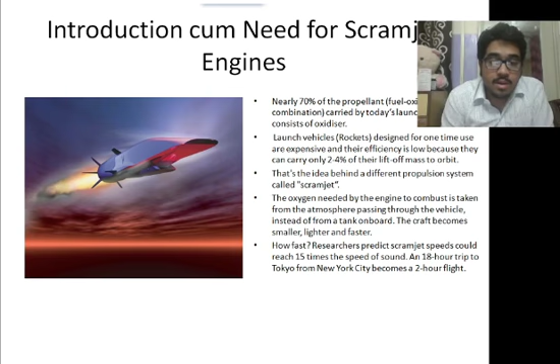And also, if we go through a commercial aircraft, it would take 18 hours to reach from Tokyo to New York City. But we can cover the same distance by scramjet engine in just 2 hours.

Now let's look at a brief history of the scramjet engine. In the 1950s and 1960s, a variety of experimental scramjet engines were built and ground tested in the US and the UK. However, the first successful scramjet engine flight test was done in 2002 by Australia. And until today, there are only 4 countries that have demonstrated scramjet engine technology.

Now you might wonder how difficult this technology is that only 4 countries could have mastered it. And the experimental work for a scramjet engine started around 1950, but the first successful flight tests were done in 2002. So you might wonder, why did it take more than 40 years to realize this technology into application? We will address this question later in the challenges.

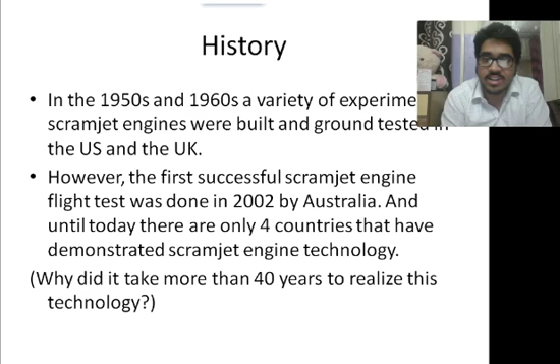Now let's try to understand the working and principle of the scramjet engine. But before trying to understand the principle of scramjet, we need to understand the principle of turbojets, because turbojets came much earlier than the scramjets, and it will help to understand the principle of scramjets. You can see in this picture down here, the picture shows Rolls-Royce RB211 Trent turbofan engine. This is one of the most common commercial aircraft engines used today.

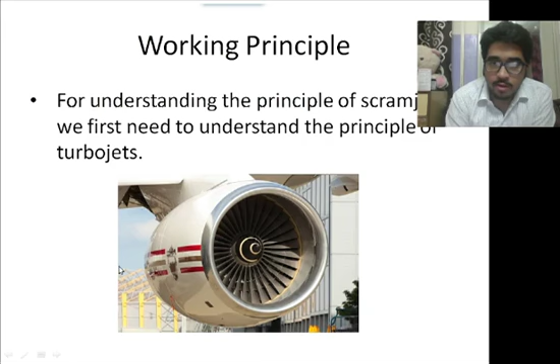Now, there is a simple principle for every air breathing engine. This is the same for every air breathing engine. It goes as follows. First, we need to increase the enthalpy of air by increasing its pressure with the help of the compressor and its temperature by the combustion chamber. Only then we can add the fuel to the air. After the temperature and pressure of the air is high, that means the enthalpy of air is high, we can utilize this enthalpy and convert it into kinetic energy with the help of a nozzle. This is what we do in this turbojet engine.

First, the air enters inside the intake through the fan and then goes into the compressor, where the pressure of the air increases, and we know if the pressure of the air increases, temperature increases simultaneously. After the compressor, the high pressure, high temperature air goes into the combustion chamber, where the fuel is added and ignited. So now the temperature increases further.

Now we have a high enthalpy air after the combustion chamber. This enthalpy gets reduced by a small amount in the turbine. Now you might wonder why we have put turbine here. The turbine is put just so we can get work for the compressor. So turbine makes enough work to run the compressor,

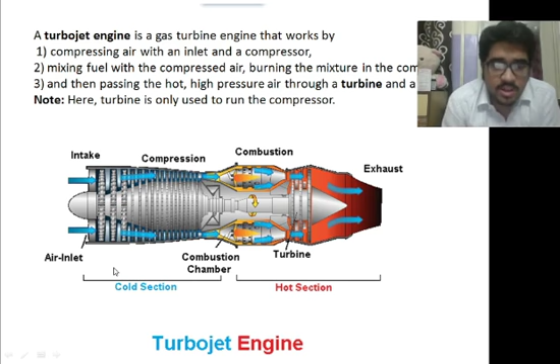Ramjet engines do not have any moving part, unlike the turbofan engine which we just saw. It is an open duct constituted of an inlet, shown here, combustion chamber and a nozzle. Now we just saw that a turbofan engine has a lot of moving parts, mainly 3 moving parts, including fan, a compressor and a turbine.

All 3 are missing in the ramjet engine. A ramjet engine is just an open duct. It doesn't have any moving part. It just has an inlet at the starting of this duct. Now you might wonder, if it doesn't have a compressor, then how is the air compressed before the fuel ignition?

We all know that for the air to ignite, we need it to be at very high pressure and temperature, and the ramjet engine doesn't have a compressor. So how do we compress the air in a ramjet engine? We do it by ram effect. At flight Mach numbers greater than 2, the incoming air, if captured and decelerated properly, can be compressed to required pressure.

So air enters through the inlet at around Mach 2. It then decelerates, and with the decreasing velocity, pressure increases, and this is known as the ram effect. The decrease in velocity and the increase in pressure, this is known as the ram effect. After that, we put the fuel in the combustion chamber, ignite it, and then the air comes out of the nozzle at very high speed.

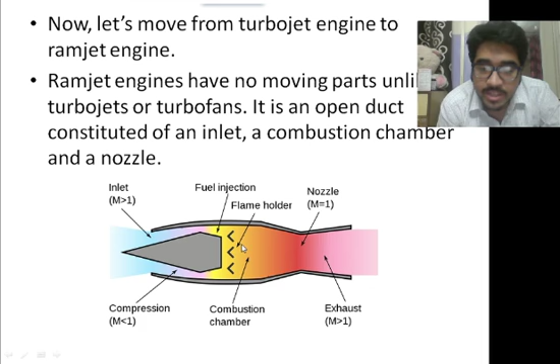engine is done supersonically. You can see in the ramjet engine, air enters supersonically, that is at around Mach 2, and in the combustion chamber the flow speed is subsonic, that is less than the speed of sound. But in the scramjet engine, air enters at around Mach 5, and in the combustion chamber the airflow speed is not less than the speed of sound. So in the scramjet engine the combustion takes place supersonically, while in the ramjet engine the combustion is subsonic.

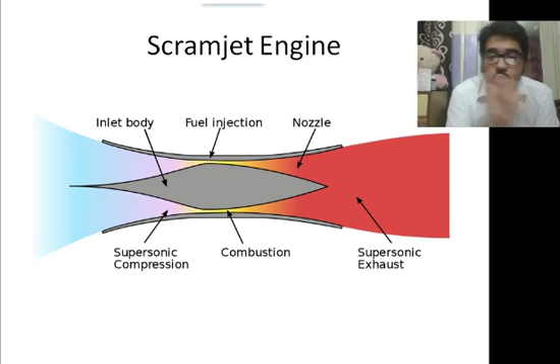And this is why it is called a scramjet engine, because a ramjet engine in which the combustion is supersonic is called a scramjet engine, that is, a supersonic combustion ramjet engine. Now we need to understand some more information about scramjet engines.

In scramjet engines, the engine is airframe integrated. Now what is an airframe integrated vehicle? You can see in this picture below, there is a vehicle shown. This is the complete vehicle, and these are the scramjet engines stacked one after the other, and one of these engines is shown in the expanded view here. Now we know what happens inside the engine. We have an inlet, a combustor and a nozzle, but what happens on the airframe?

We need to understand that when the air strikes the front part of the vehicle or the aircraft, air is compressed, and this compressed air then goes into the scramjet engine, and after coming out of this scramjet engine, air again moves around the aircraft, around the airframe, and expands. So not only is the engine doing the work of compression and expansion, but also the airframe is doing the work of compression and expansion.

The front part or the forebody is compressing the air, and the aft body is expanding the air. So the airframe and the engine are integrated. Both of them are doing some work, and both are important. So this is known as airframe engine integration.

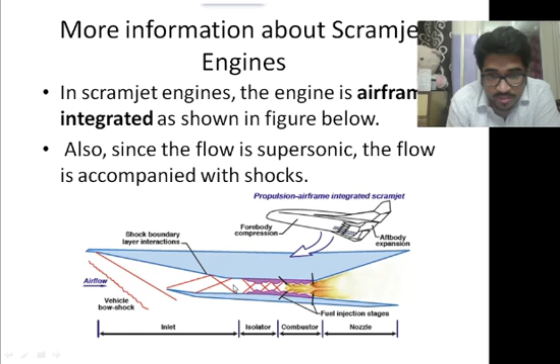Another thing is, since the flow is supersonic, the flow is accompanied by shocks. We all know that whenever the vehicle speed is more than the speed of sound, shocks are generated. You can see that inside the engine there are shocks.

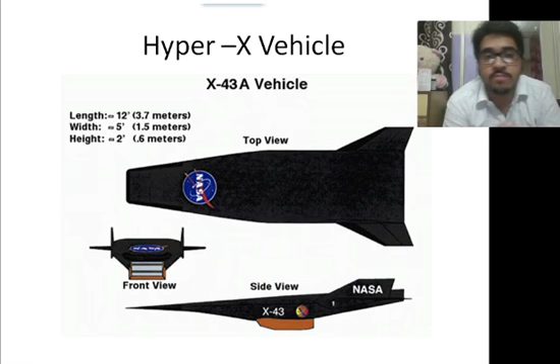Now after understanding the working of the scramjet engine, we need to understand a few applications of the scramjet. The first one is space applications. We have already looked over the space applications. Scramjets can be an alternative to rockets. Rockets carry their own liquid oxygen with them, and therefore the payload they can carry is only 2 to 4% of their lift-off mass. However, scramjets use atmospheric oxygen for combustion, which helps them to carry more payload.

Therefore, scramjets can help reduce the cost of the satellite launching business to a very large extent. So with the help of scramjets, we can reduce the cost of satellite launching, which is the most important aim for today's countries.

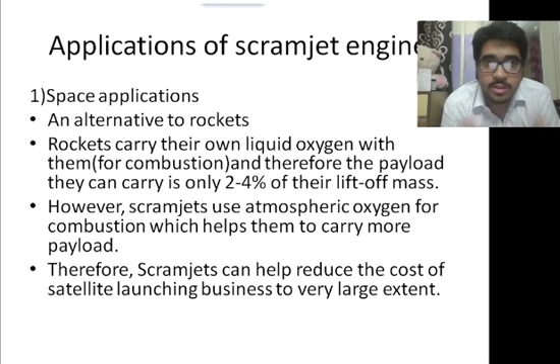Now, after looking at space applications, we will look at military applications. The scramjet engine is also employed in missiles. Now, you might argue that we already have ballistic missiles, so why do we need scramjet missiles? If you look closely, a ballistic missile is powered for half of its flight, and for the rest of its flight, it is a stone. It is not powered for the rest of the flight. It goes as a stone. So for the rest of its flight, it cannot maneuver itself.

It cannot reroute itself. But a scramjet missile is powered through its entire flight, so we can maneuver it efficiently. So scramjet missiles have better maneuverability and higher speed, which makes scramjet missiles better than ballistic missiles.

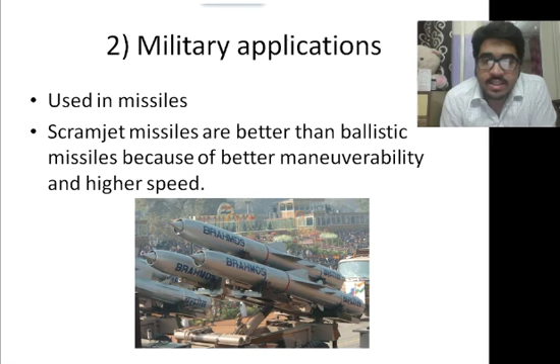Now we come to the civil applications. In around 1975, the first supersonic flight took place by the Russians, and 3 months after that, the British and French developed another supersonic vehicle known as Concorde.

These vehicles are not used now. Currently, the supersonic vehicles are not used for commercial aircraft. But researchers predict that the Scramjet speed could reach 15 times the speed of sound, and an 18-hour trip to Tokyo from New York City becomes a 2-hour flight. Wouldn't it be wonderful if we could travel between any two parts of the world within just 2 hours?

Now, we will look at challenges to this Scramjet engine technology. Now, it's time to answer the question we put earlier. Why did it take more than 40 years to realize Scramjet engine technology? Scramjet engines are simple in the sense that they don't have any moving parts. But applying Scramjet technology into reality is not that simple. We will address this in this section.

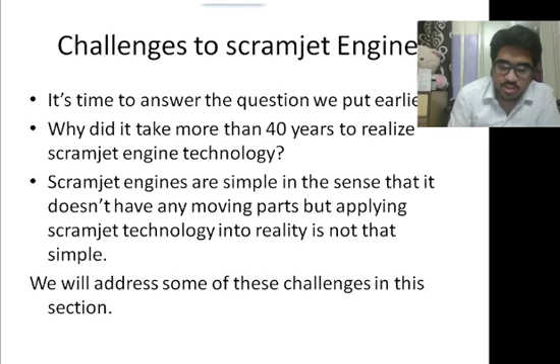So the first challenge to this Scramjet engine technology is the residence time. Now, residence time of a vehicle is the time for fuel-air mixing and combustion in the combustion chamber. We know that the airflow speed in the combustion chamber is more than Mach 2. So airflow is very high inside the combustion chamber, and to this high speed airflow we have to add fuel, mix it properly, ignite it and hold the flame.

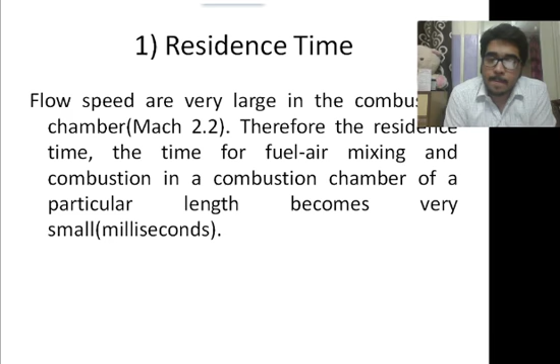We have to do all these works in a few milliseconds. So it becomes a very difficult task to mix fuel into this high speed air in just milliseconds. This is one of the biggest challenges to Scramjet engines.

Now comes the engine-airframe integration. Boeing makes the airframe, Pratt and Whitney makes the engine. So the expertise of airframe making and engine making are not in the same place, and that's okay for a commercial aircraft because the roles of engine and airframe are separated. But you cannot do this separately for a Scramjet engine. The engine in the Scramjet vehicle is part of the airframe, because there is a big aerodynamic coupling between the two.

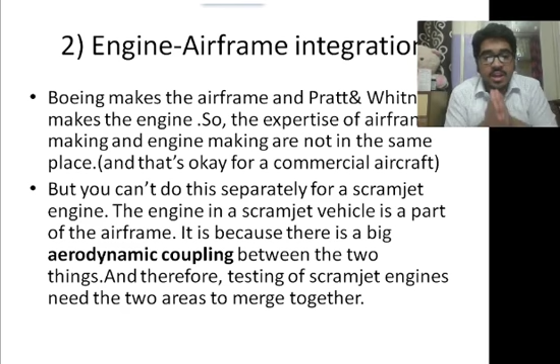So we just saw that the airframe of the vehicle and the engine are integrated. They both have the job of compressing and expanding the air. So the testing of these Scramjet engines needs the two areas to merge together.

Now comes the drag. If you want a reasonably long residence time inside the combustion chamber, you need to increase the length of the combustion chamber or the length of the vehicle. If you increase the length of the vehicle, the drag on the vehicle increases, as the drag is not only on the airframe but also inside the engine, as the engine length is comparable to vehicle length.

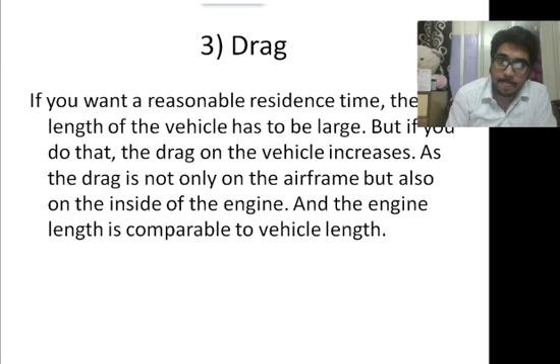Now comes testing of the Scramjet engines. Building a wind tunnel for Scramjet engines is very expensive, because to test any engine for supersonic speed, the power required for testing, even for a very small time, is very large. We have a lot of subsonic wind tunnels all over the world, but only a few supersonic wind tunnels. This is because testing any vehicle for supersonic speed in a wind tunnel needs a large amount of power even for a very small time.

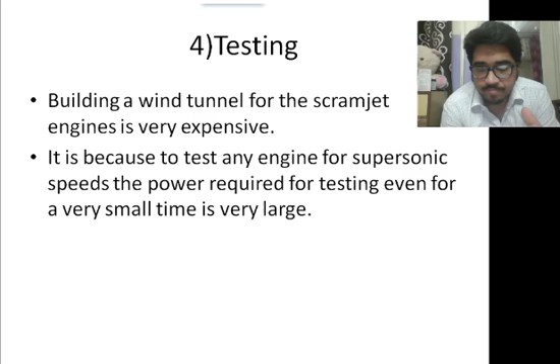Now, since the testing is very expensive, we go for small scale testing. Even for small scale testing, we have another problem, which is scalability. How can you ensure that whatever you test at a small scale, you can apply the same thing to the large scale? This is the problem of scalability.

You cannot be sure that the results for small scale will apply to the large scale for a circular intake, but it is easy for a rectangular intake. For example, if you test a small rectangular intake, you can place rectangular intakes side by side and the results will be valid for a large rectangular intake.

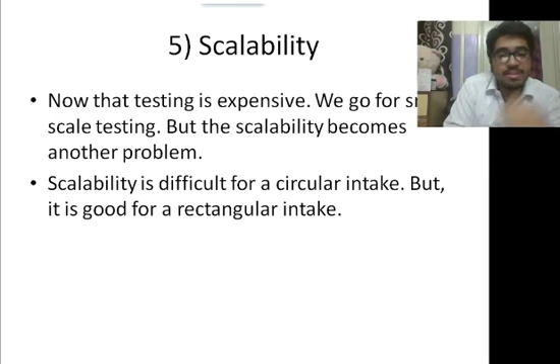So we have reached the conclusion of the presentation. Today's satellites are launched into orbit by multi-stage satellite launch vehicles that can be used only once. These are known as expendable vehicles. If those vehicles are made reusable by Scramjet engine technology, the cost of launching satellites will come down significantly.

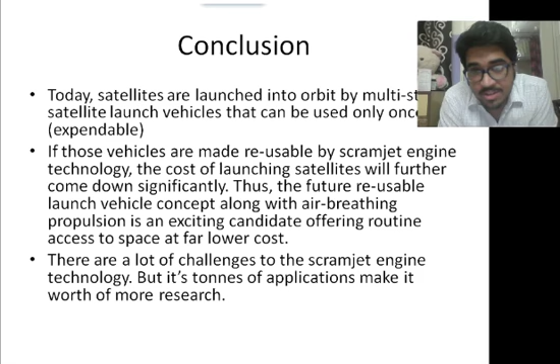Thus, the reusable launch vehicle concept, along with air-breathing propulsion, is an exciting candidate offering routine access to space at a far lower cost. There are a lot of challenges with Scramjet engine technology, but its range of applications makes it worthy of more research.